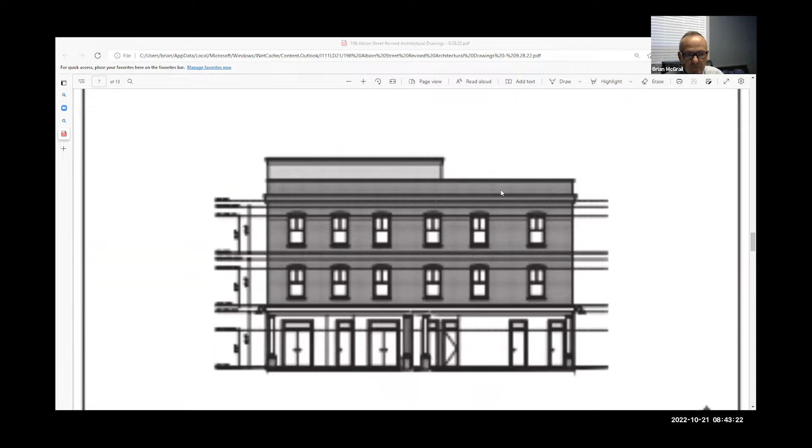This is really the quality building he's proposing. As mentioned, it's before the Board of Appeals now, and the hearings have, in my mind, gone very well. They like this building a lot, they like the style. Giancarlo has a lot of experience in Boston, so he's trying to match the brick in the area. This building will be all brick all the way around, so there won't be any fake sides to the building. I think it would sit very well on the corner. This is from the Albion Street side, and I'll give you a little bit of a look at the nighttime view, and then some of the materials.

John, do you want to put up your site plan and walk the board through it? There is a bit of a benefit here: for the laundromat, there are a number of curb cuts. We'll be closing one of those up to control the traffic flow a little more than what's happened at the site in the past. John can walk you through the site plan, and then Scott can talk about traffic, which I'm sure you're most interested in.

Good morning, John Ogren, Hayes Engineering. What I have up on my screen is the existing conditions plan. You can see the laundromat, and that the majority of the existing lot is basically paved. There's parking out in front, and a fenced in area in the rear. This property is just over 15,000 square feet. It resides in both the business and industrial zones—majority of it is in the business zone, with a small corner that's industrial.

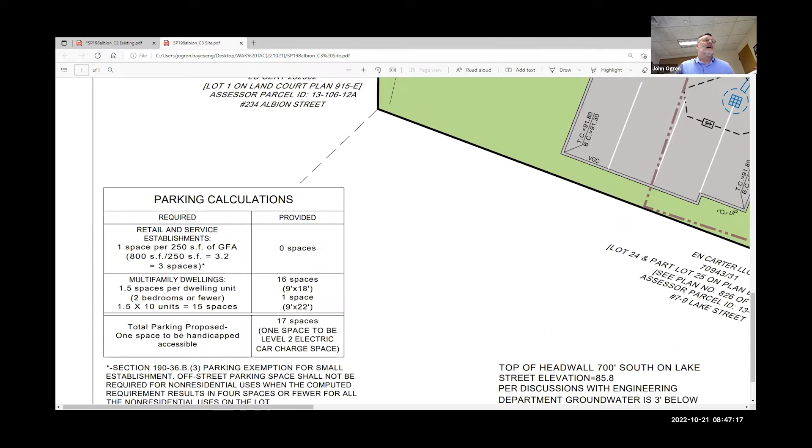The two components are the commercial portion and under zoning section 190.36.b.3, there's an exemption for smaller establishments. If it results in less than 4 parking spaces, there is no parking required. We have about 800 square feet of retail, which calculates out to about 3 spaces, which is less than 4.

So no spaces would be required for that. Looking at the multifamily, it's 1.5 spaces per dwelling unit, and 10 units would be... I'm sorry, I misspoke. Required would be 15. We're proposing to have 17 total parking spaces. One of them will be handicap accessible.

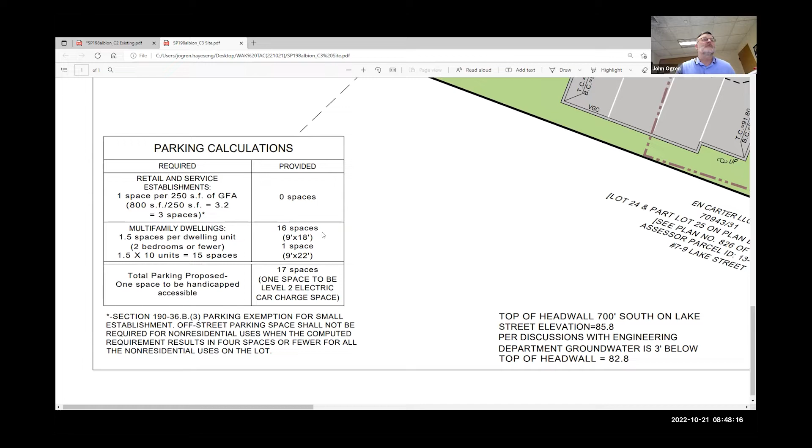We also have a note that one of them will be an EV charger. We'll have an EV charger. I think we're looking probably toward this space, but we haven't really decided that.

The only other thing in terms of traffic and flow I'd like to add, in discussion with the ZBA, they did request that we look to see if we can add another parking space, and it looks like we may be able to with some small tweaks, sliding this forward. We'd still have about 10 feet from the back edge of the sidewalk. We might be able to get another parallel parking space in there, which would bring our total up to 18. And one other thing is there are existing sidewalks all along basically the frontage of this property.

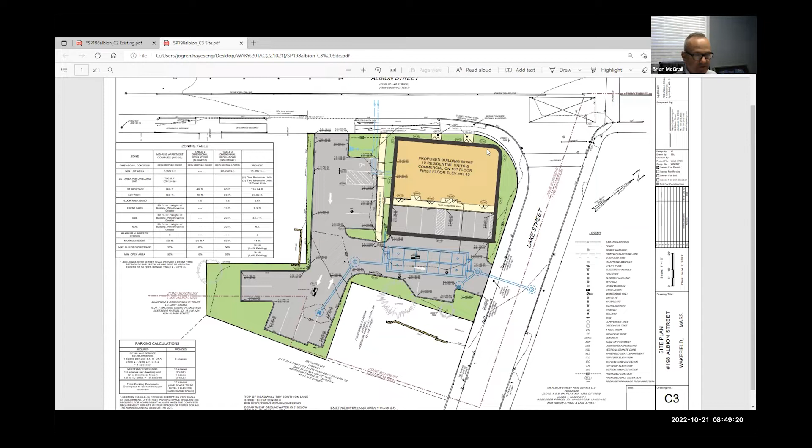I can answer any questions, or I can go over to Scott. Yeah, I'd just like to add real quick, the makeup of the units is there's actually 8 one-bedroom units and 2 two-bedroom units that are being proposed.

All right, what would visitor parking look like? So are these assigned spaces or? Usually, sometimes the zoning board will want that, sometimes they won't. So we haven't really gotten that far with them on how they're going to want that. If you wanted to make a recommendation, I'm sure they would entertain it.

So my only concern is that there's time restricted parking on Albion Street, and there's really none in the Lake Street area, that's all restricted there. So there's not a whole lot of opportunity for overflow for visitors and things like that. So as long as that's a consideration.

I think piggybacking on that, I just want to make sure that the retail that's proposed is going to work. I know you can go after the exemption for under 4 spaces, but I don't know how you have the parking to support it. Would that be on the street? Is that the intent?

Yeah, they're really looking at that. This is right within the railroad. You've got a lot of residential that's gone in there and is going to be going in there, so it's really going to be a lot of foot traffic that's going to service that retail. It's not going to be a huge retail, it's going to be under 1,000 square feet.

Now, are these condos or are these rentals? The intent at this point is rentals. Okay. Is that correct, Giancarlo? You're there, just to confirm. Yes, that's correct.

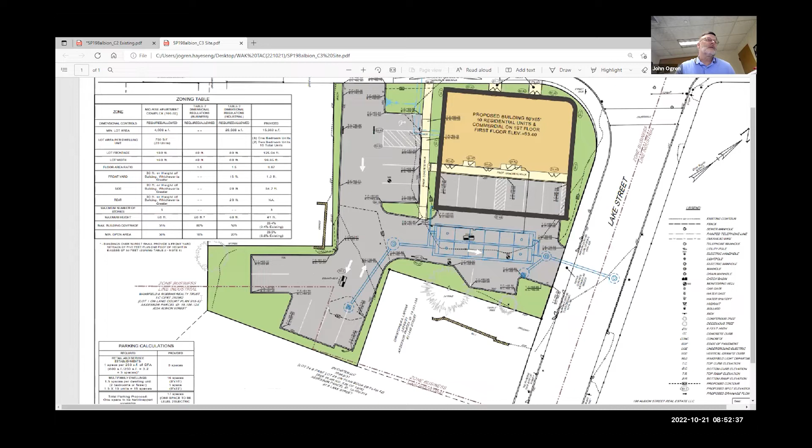Or even adding one, and it looks like you can also add one towards the street too, with the main entrances. Yeah, we were trying to keep it, you know, initially we were trying to keep the requirement for 15 feet off of the right of way for parking, but obviously with us sliding this forward, we're not going to be in that. So we could look at the potential of adding another one here too.

I think if you got the extra 4 spaces, I'd feel very comfortable with this, personally. Yeah, I would agree, Bill. A few more spaces would definitely help, and I think as long as the developer understands that there's time restricted parking on Albion Street, which would obviously help the retail and restaurant end of things. But as far as overflow parking, there's really no opportunity for that on street. And as you get into the neighborhoods off of Albion Street, that's all time restricted or exempt by resident permit, and that would be for residents of those streets, Cedar and the like. It would not be available to residents of this or any multifamily. So even though we have some permitting in the area for those side streets, those are not available for residents of other streets. That would just be my little asterisk there. But a few more spaces, I would be comfortable with this. It seems like it's fairly low impact overall.

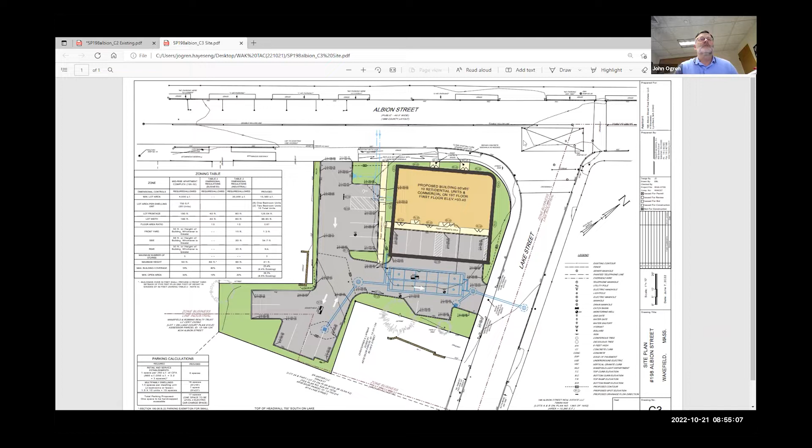Yeah, we can certainly do that because the requirement for the multifamily dwellings is 15, and we have 17 total spaces. And that would provide whoever's working in the retail a place to park. Right, so I think if you were to add that space towards Albion Street, have that as retail space that provides at least a spot for folks to come, and then you could do like a shared parking model at night, that definitely works. Just adding the other spaces and the tandems below, and then you meet your parking count, and I think the site as a whole will operate a ton better.

Yeah, so potentially add one here, add one here, and then the bottom left-hand corner is tandems. Even if they're smaller spaces, if you go with the compact or something, you're just adding spaces so people have places to park. Because you have a couple of 2 bedrooms, right? Is that what you said, Bill? Yeah. So you could just have the 2 bedrooms have those tandem spaces. I like that idea. It would be helpful if you would reference that to the zoning board. Yep, then we'll add that to our next comment letter.

All right, anybody else from traffic advisory on this development? Can I add one? Go, Dan. We're seeing more and more developments in Wakefield and more people that ride bicycles and motor scooters. Is it possible to have some kind of bike rack on this? Or am I speaking out of turn? I know we have one level 2 EV charging station, and that's great to see. But I think more and more we're seeing more bicycles, so just have a bike rack somehow next to the parking. Yeah, that's a good point. I think we make that a recommendation as well.

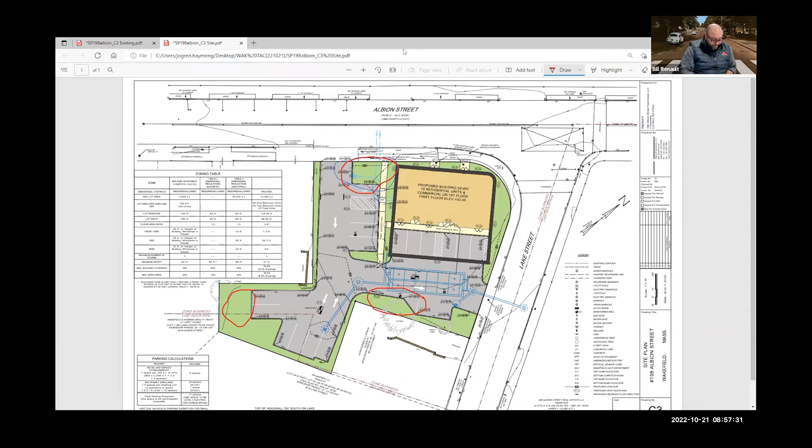All right, anybody else from traffic advisory have any comments or questions? Any members of the public have any comments or questions? We'll give about a minute for that.

Sorry, Joe, I did have one other question just about trash pickup. Sure. Just wondering where that's happening. I believe the trash is inside the building, so it'd be something that's wheeled out and picked up.

It's along those lines. What I forgot to ask, and it's not really traffic related, but I'll put my police hat on for a minute - secure package room or delivery, where's that going to be? Or is that part of the plans?

The common area, utility room on the first floor. How about cameras? Has that been considered?

Giancarlo, you want to touch base on that? What's your thoughts on cameras? Yeah, I would say so. Obviously, we do that on a lot of our other developments as well.

Resident safety for us is number one. In addition to being a developer, we own a property management company as well, so we deal with a lot of the packages. We have some secure entry systems where an Amazon or whatnot has a unique code to enter the building and leave packages and store them correctly instead of just leaving them outside. So safety is a priority, and cameras is something we're going to look into as well.

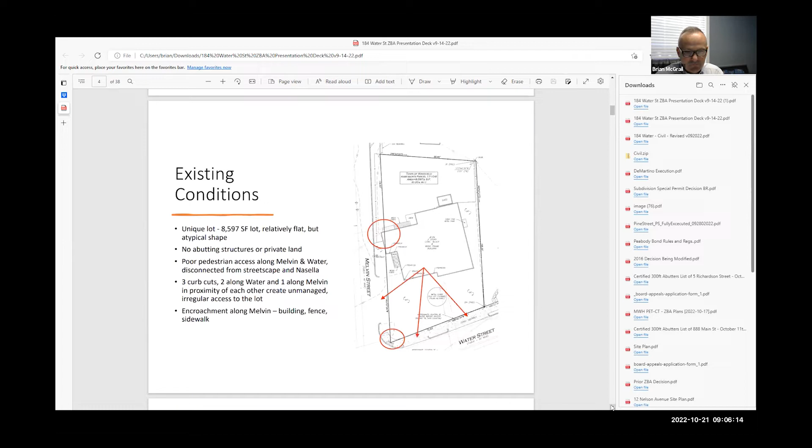There's very poor pedestrian access along Melvin and Water Street. It's disconnected. If you go back to these pictures, you'll see there's no sidewalk connection going down. So all the kids that go to the playground, the Little League - it's not the safest situation because there's no sidewalk here. And we're going to improve that.

This gives you an idea of the location. These trees really don't exist anymore - a lot of them have been taken down. If you go down there and take a look, this is kind of an old overview shot from quite a while ago.

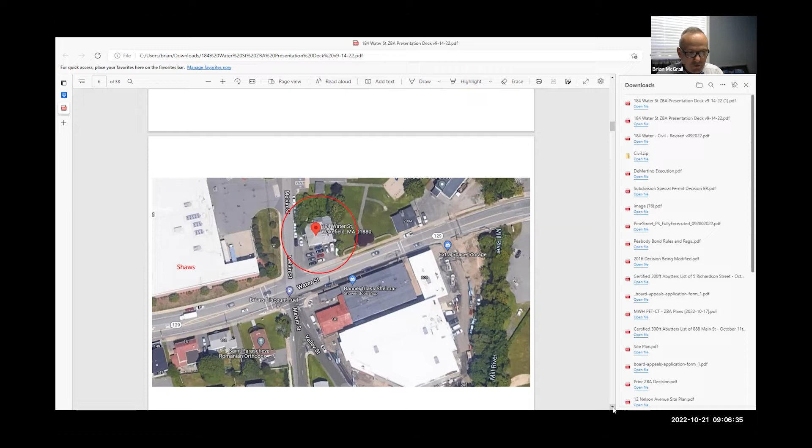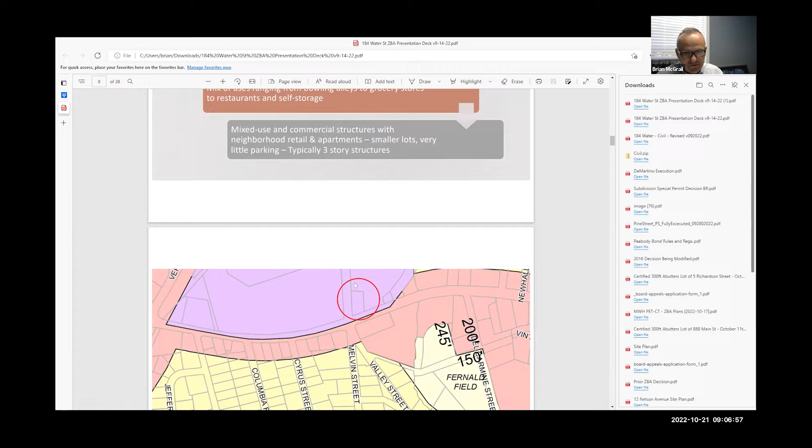As far as the neighborhood goes, it's a mix of business and residential use. It's zoned industrial - we've got the bowling alley, the grocery store, restaurants, self-storage. This is the little lot, as you can see, and this is Melvin Street, and this is the Nasella Playground - just a little lot that sits off on its own.

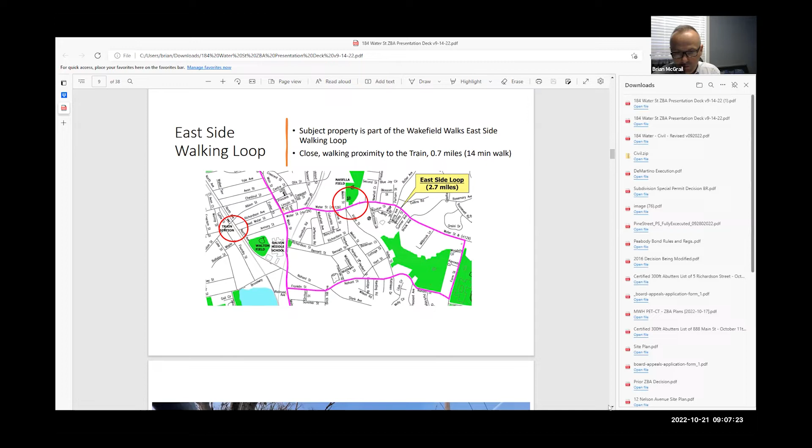Interestingly, this property is along what's referred to as Wakefield Walks, the East Side Walking Loop. It's in close proximity to the train - only 0.7 miles, about a 14-minute walk from the train station. As I mentioned, we're going to improve that walking loop with a lot of sidewalk improvements, etc. Just a shot from the other side of the street.

As I've mentioned, there are already 3-story mixed-use properties along Water Street. This is a three-story building as well that's being proposed. And this is the building. It's in the process of being refined through the Board of Appeals process, but I don't think anything's really going to significantly change.

One thing we're doing is anticipating this might be a cafe. We had input from some of the neighbors during the process that they would like to see that - it would probably work well with the Little League field behind it. So we're looking at making this landscaped area portion here probably end up being an outdoor patio with some tables that people can sit outside.

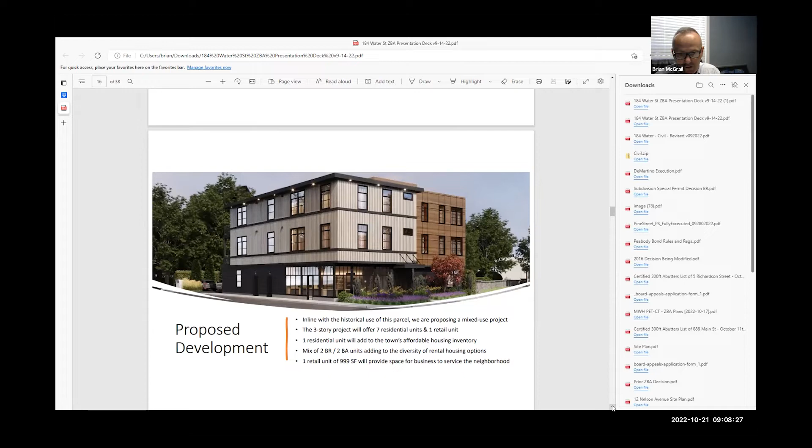It's going to be a 3-story project with 7 residential units and 1 retail unit. One of the units will be affordable, as I've mentioned, and will go to the housing inventory of the town.

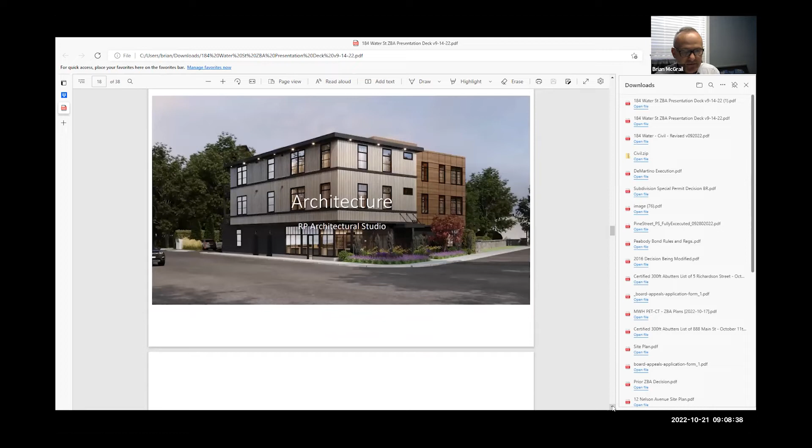This is just the architecture, which I'll go through pretty quickly.

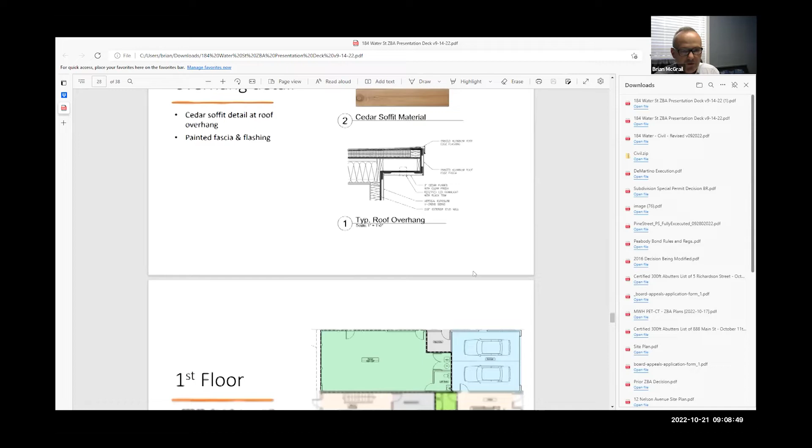I'm going to hand it over to Carlton, I just want to give you an idea of the project. Do you want to bring up your site plan and show the board the improvements we're proposing on the sidewalks and pedestrian connections?

While you do that, I wanted to highlight: we're going to have a lot of infrastructure upgrades with pedestrian walkways leading to the field. Three disjointed curb cuts will be replaced to manage traffic. Building encroachment will be taken out. We're going to add an affordable unit, a small business space, and remediate the environmental issues on the property. The parking graveyard will be eliminated as well. So Carlton, it's all yours.

I think I just need to be allowed to share. If you can, I got off, try again. It says a host disabled participant screen share. Oh, there it goes. Now, see it now? Yep, we have it. Okay.

As Brian alluded to, we're going to provide a concrete sidewalk coming around here, connecting Water Street down to Melvin Street, all across the front of the property, removing all curb cuts from Water Street, as that was kind of an open parking area.

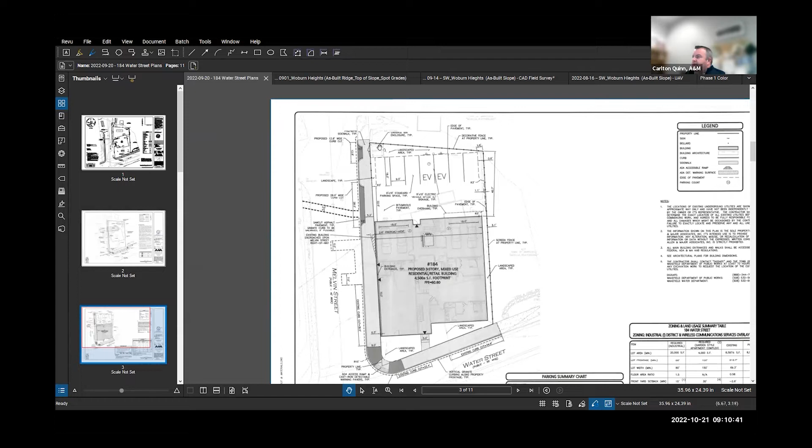Concrete sidewalks, granite curbs, ADA access ramp. The parking in the back has a 22-foot drive aisle. We're going to have 4 garage parking stalls and 7 surface parking stalls, and 2 EV stations on the lot. The dumpster will be provided a curb cut here to facilitate pickups.

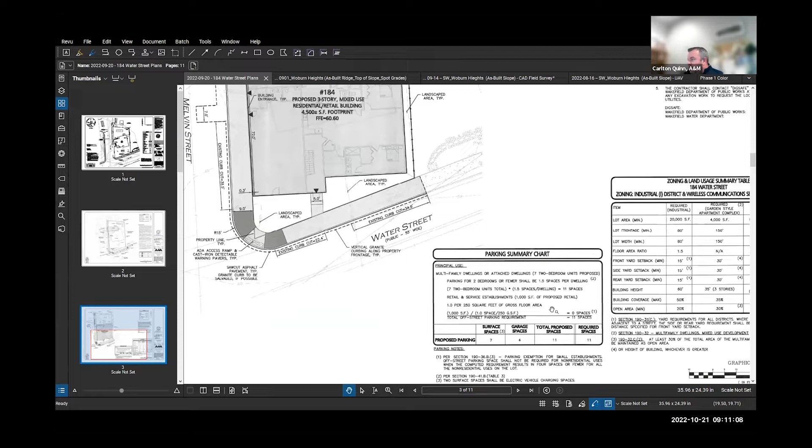That's generally it. We've provided this to the ZBA, noting there's a lot of on-street parking allowed in this area also, so we have adequate parking stalls. We have just under 1,000 square feet of retail, which requires no spaces, and 7 two-bedroom units requiring 1.5 spaces each, which requires 11 stalls, which is what we provided.

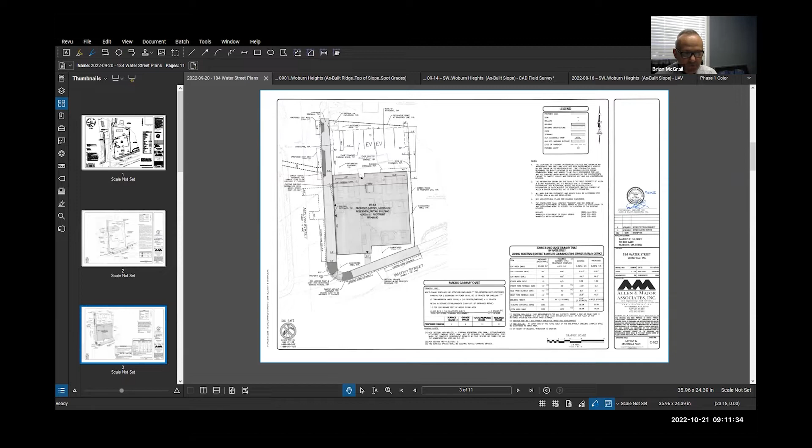Alright, any questions from TAC members? I had one question related to the layout of the driveway. In between the main driveway and the access for the trash, there's some curb space there. Would parking be restricted in that one little stretch? I'm not sure if it's long enough for an on-street space, but I imagine people might try to use it for parking.

Yeah, that wouldn't be big enough for a car to park there without restricting access to those 2 items, so we need to restrict parking in that location. Yeah, I just want to make sure - I couldn't tell on the scale if a car could fit there.

Lieutenant Anderson, this is Julie Smith Galvin, sorry I'm off camera. I would just recommend people look into bike racks around there. There's going to be a lot of kids coming between the schools and going to Shaw's along that way, and if there's a cafe there, I think it'll be a huge attraction for people who are not in cars. Maybe the town can work with the developer and put bike racks there for both Nacella and for this space.

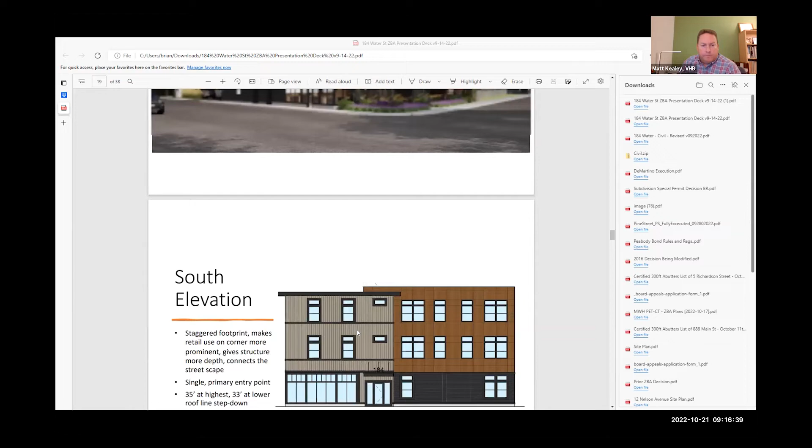It's fine. There's also, Severio, are you there still? Yeah, I was going to say, just one note to keep in mind, since that version of the rendering you've got there - given feedback from some of the abutters and the interest in having a cafe, we actually proposed during the last ZBA hearing converting that landscaped area on the immediate corner there into an outdoor seating area, a patio.

So we've gone ahead and updated our plans, Carlton's team has done that. We presented basically a draft version during the last hearing, but we'll formalize that during the next hearing. So you won't have any landscaping there, you'll have an 18-inch tall wall. We just put a small decorative wall up to kind of enclose the patio area, to define it a little bit better. So there will be that small wall, but it won't be any taller than 18 inches.

Got that up on the screen now, Severio, you guys can see that? Okay, yeah, perfect. Can we make sure that's like a porous paver? Is that doable? Would you have an issue with that? I'm sorry, say that one more time. To do that in a porous paver as opposed to a standard concrete or paver patio?

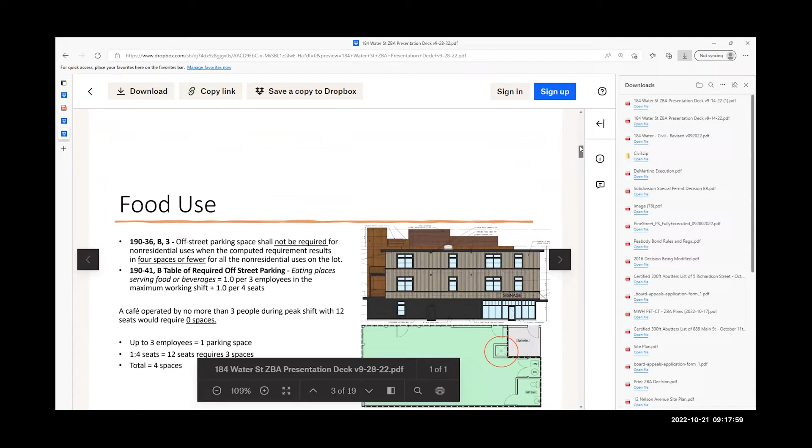Yep, yeah, that's actually what we proposed during the last hearing. It's actually a Techo-Bloc, it's from the Linnea collection, I can send you that offline. I've already used it, I know it. So that's the one, okay perfect.

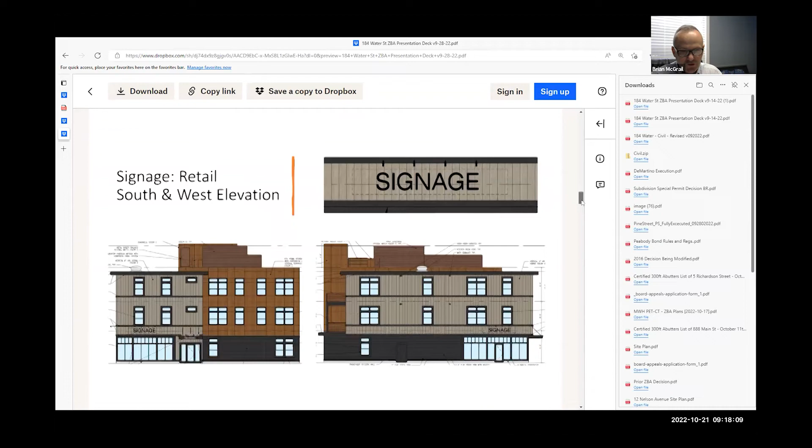Can you also address - because you've got Bill Renault on here now - we talked about doing some landscaping between our building and the park. It's kind of like an old chain link fence there, Bill, that's in a state of disrepair, and as part of this, to kind of spruce up the park in the neighborhood, Severio has a desire to do some landscaping and clean that up a little bit.

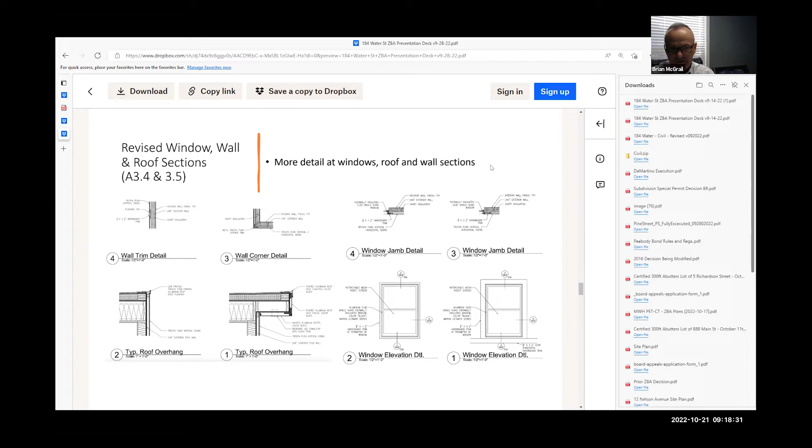Go ahead, Severio. Yeah, so our rendering company took a little bit of creative liberty and saw that there were vines in the existing Google imagery. So they actually put in hedges, but in talking with Carlton's landscaping team, it doesn't seem like it's going to be really realistic to do a managed vine system.

I looked into a few options and was going to let the ZBA know, because Jim McBain mentioned he kind of liked the design. We considered it and actually went out to a couple of vendors, but the cost is astronomical for 80 linear feet. It's going to be like $100 grand by the time we're finished, we just can't absorb that kind of cost.

That seems like a great amenity, no? Right, yeah, literally a vine wall, it's crazy.

So we're now proposing a tan colored fence. We'll clean it up obviously, but we're wondering, that fence, we're not sure who owns it, whether it's Wakefield's or the previous owners. We're wondering if everyone's amenable to us just removing the chain link fence and replacing it with our vinyl fence.

It doesn't jump out at me as an issue. It's kind of like a typical playground fence, Bill. It's kind of rusty and in a state of disrepair, no one's fault, time has kind of passed it by. At the same time, it will clean it up and make it safer for the park and for the project.

That would be on your property though, right? So it's not on town property? Yep, exactly. We would just remove it, I don't know exactly where the fence line is, and Carlton could probably speak better to that, but I don't know who even.

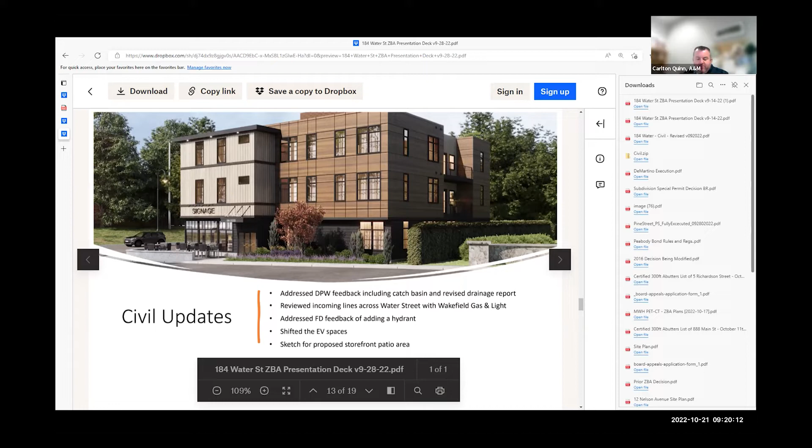Yeah, it's right in this area. It's mostly on our property, just kind of weaves in and out of the property line. It's right on the property line. I don't see an issue at all. It sounds good to me. As long as ZBA is on board with it.

Brian, okay, yep, awesome. Joe Conway, Mr. Mayo, this is Joe. Can we, when you guys get an idea, just make sure you shoot that to us? Because there's actually two other sections of chain link to the sides of that fieldstone wall. I think to dress the whole thing up, we might be interested in seeing what you go with.

If we could do something similar to kind of dress up the frontage to Water Street there, whenever you get that, if you can just shoot it to us, I can talk to Dennis and Bill and go from there. Maybe we'll clean up the whole thing while we're at it.

Yeah, that's fine. This kind of shows you that chain, see it there going along the side of the building? Behind that Isuzu there, we actually have like 4 feet there, 4 feet to the other side, just kind of connecting the infills. So we'd probably be interested in cleaning those sections up too, so we don't have the beautiful building there and then leave 8 feet of the old, past its time fence.

Yep, I see it. It's essentially 2 extra sections of fence, but I'd hate to see it all get uniform and nice looking, and we leave those in place. Yep, we can definitely do that. We'll take care of that, Joe. Thank you, I just volunteered Severio to do that work.

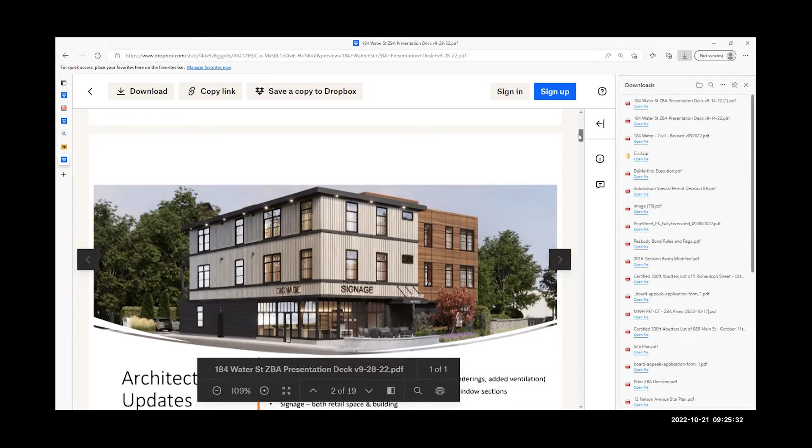Looks like Water Street, right here in the corner. So the seating is actually really along Water Street. The way I'm looking at it, that little retaining wall is essentially on top of the curb, and then you have tables and chairs, and the sidewalk will run between the building and the tables and chairs.

The sidewalk is outside the wall. Oh okay, so you would walk around it, and there's going to be a sidewalk installed going down Melvin Street towards the park. None of that patio will be in the public way, and we're going to upgrade basically that entire sidewalk walkway wrapping around the entirety of the lot, so we'll make all those improvements. So rather than right now where it's all disconnected with different means of access to the lot, we'll actually connect everything so it'll be a seamless transition.

I can share a site plan of the seating, the patio, if you want. That's fine, go ahead. What I was going to say is what you just explained makes a lot more sense, I just couldn't tell the orientation there. This might help, it'll be great for someone like yourself. If you're walking over from Wiley, you'll be able to just cross the street and make your way right around to Nazella. Okay, go ahead, I was going to move on.

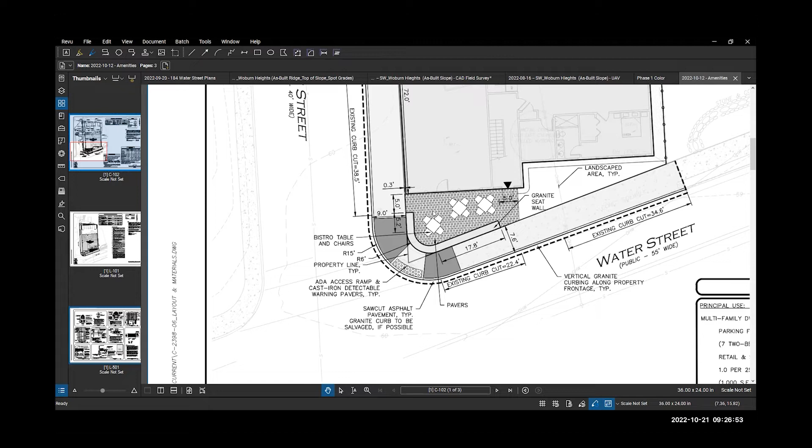There was discussion about the signage there. I've actually already submitted a comment or request to the DPW. The crosswalk that was put in on Water Street, that goes in between the stone wall there to the playground, was repainted and the curb cutouts were done, but there is no signage for that crosswalk at the current time. Definitely, looks like we forgot that when we reconstructed it, so we'll add that in.

That would be great, because there are a lot of kids I see going in and out of the park, both on foot and on bike, that try to use that crosswalk, and it can definitely be a challenge. The crosswalk is also missing from the documents provided as part of the traffic study that show potential parking on Water Street. Another recommendation from Safe Streets Wakefield would be to block parking on either side of the crosswalk, just to improve visibility and safety for pedestrians, especially kids, now that you're going to increase crossing there to get to this building and cafe. That would be great to have a little more buffer zone around the crosswalk.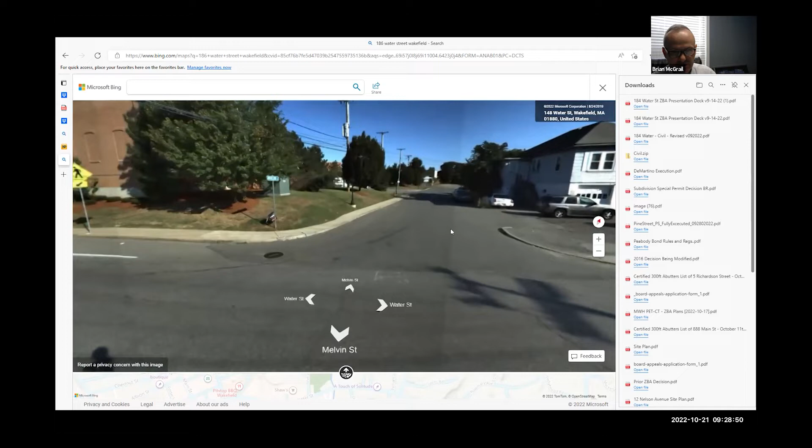And even more importantly, when kids are going to the playground coming from the Montrose Ave side, if they don't go in the front gate, they've got no way to walk safely down to the park. So all this will now be sidewalk going down. I think it's going to be a huge improvement and a huge safety improvement for the park.

Brian, can you go back to the crosswalk? Is that the crosswalk Kathleen's talking about? I think it's on the other side, it's not shown on that plan. Oh, it's not on here. This is the old one. No, yeah, I see this on the street. There's one right there, Julie. No, that's not the one we're talking about. We moved that to basically the entrance of the park. Excellent, okay, yeah, when we reconstructed it. So now it's here, Bill?

Yeah, and signage is definitely important there. If we have any of the blinking signs, this might be a high use area for it, Lieutenant Anderson, just to think about. It's definitely a good one.

Are we comfortable with that, Brian? I can't hear you, Bill, what did you say? Are you comfortable with a flashing beacon and funding a flashing beacon at that location? Severio, Severio, are you there? Severio? Sorry, yep, I'm here. I'm sorry, what was the question? If we're on with what? My service is cutting out.

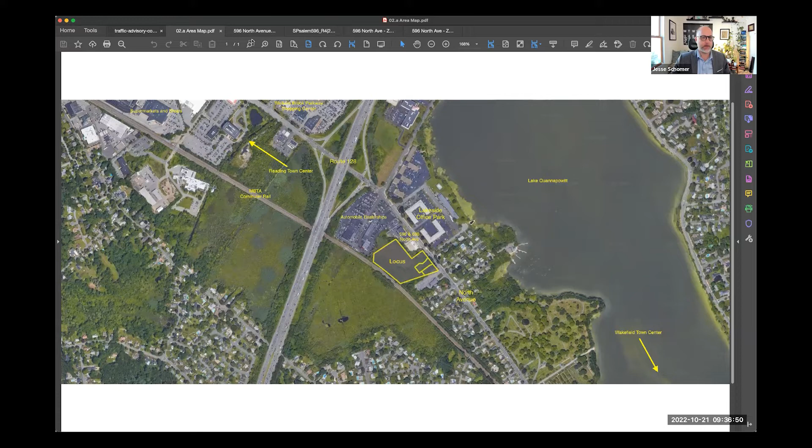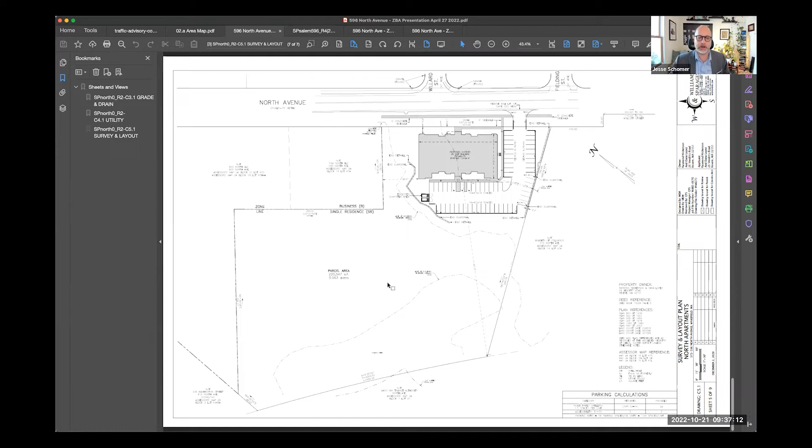I'll go to the next slide. This is the site plan of the project as it was proposed the last time we were before you, back in April. As you can see, the building is at the front of the site, there's a single sidewalk connection here, and the rear portion of the site is completely untouched.

The architecture has changed significantly since last we were before you. This was the proposed project as it was back on April 27th of this year - as you can see, it's a vision in gray, white, and muted black tones. It's currently been revised significantly through the ZBA's design review process.

This building here, which we think is much better looking and really complements the residential neighborhood to the south and across North Avenue down towards Wakefield Town Center. The current site plan - I won't steal Chris's thunder, I'll let him go over the changes in detail - but as you can see, this is the revised version of the building. The parking area is primarily the same, but we've added a significant number of landscaping improvements, including a fire pit, grill station, and a proposed covered bike rack area here for residents.

One of the changes to the project, which has come out of the subcommittee review, has really been to provide some improvements in the public right-of-way to really dress up the building and give it sort of a grand estate type feel. That was something the zoning board really pressed us on, and we were happy to do that, subject to our ability to work out an agreement with town counsel to provide that we will be maintaining this area and making sure these sidewalks are clear of snow and things of that nature.

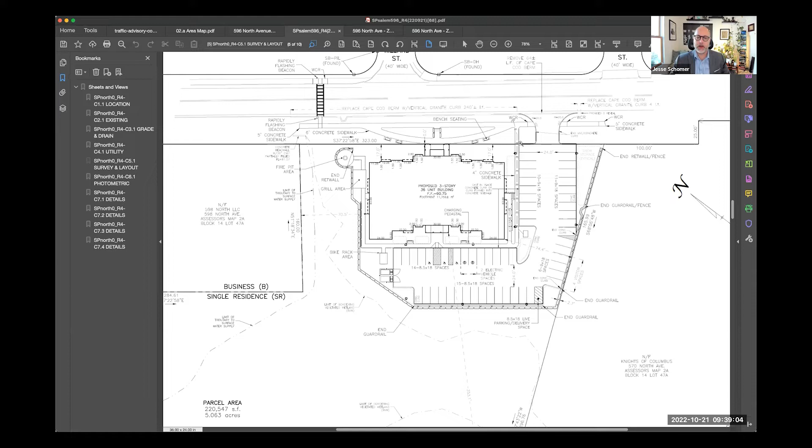As I mentioned, we were back before you in April, and at the time, you may remember that the primary issues we were dealing with had to do with visitor parking.

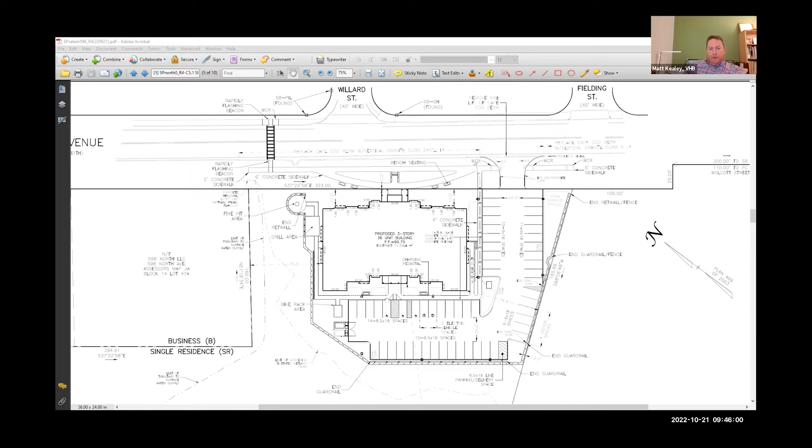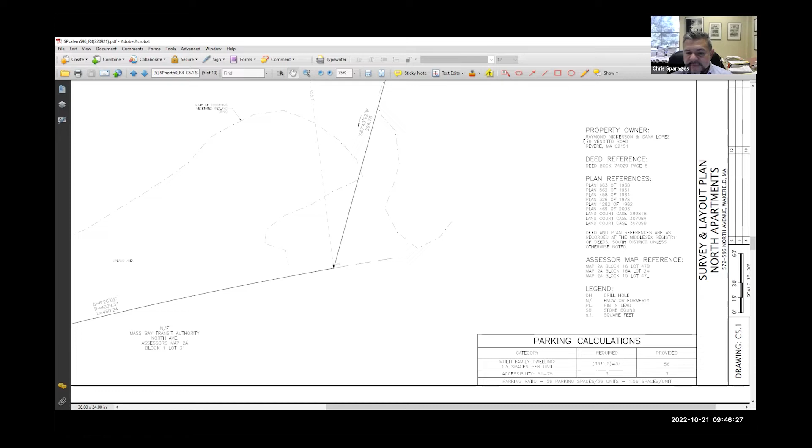Anybody else from TAC? Matt, any comments? I was just curious what the parking count was before versus now - is it for new spaces? The total parking count works out like this: the requirement is 1.5 parking spaces per unit, so that would be 54 spaces required, and we're providing 56 parking spaces, 3 of those being handicap accessible. Okay, thanks.

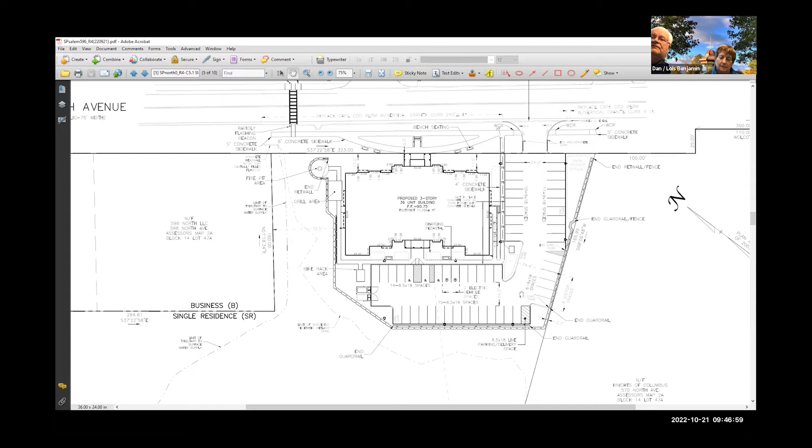Dan and Lois, I don't know if this falls under traffic or parking, but is it possible to move that bus stop further up towards the car dealership, maybe in between all 3 developments? With this many people, they might be jumping on that bus to go down to the commuter rail or connect with the shuttle bus from the new development at the head of the lake. Yeah, Dan, we talked about that with the developer this week in my meeting - that's something the town has to work with the developer on, so that's something we're going to do. We agree, it makes a ton of sense to move it here. Not many people are going to get on at the car dealership. That's what I'm saying - and they're concerned there's no sidewalks and no way to really get there. I guess you could take the bus and then get yourself a car to drive away, but yeah.

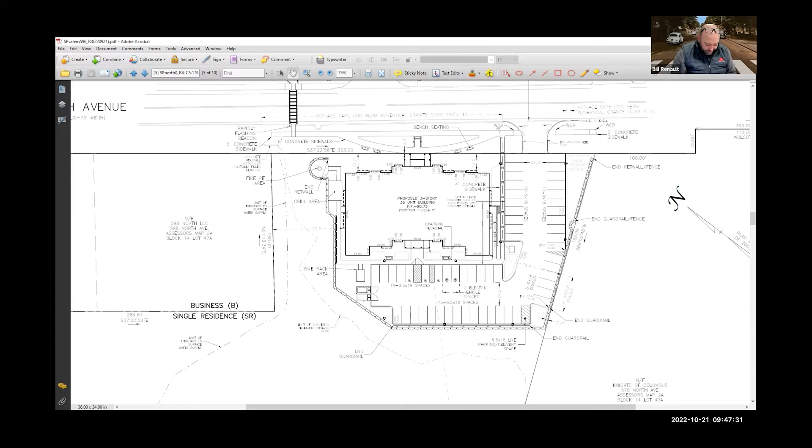All right, any other comments from TAC? Any public comments? Any comments from any members of the public on this agenda item?

All right, Attorney Schomer, I think we feel comfortable at this point drafting a memo based on the changes, unless you have anything else for us - I think we're good on our end. Great, thank you very much. We appreciate your time. Scott, did you have anything you wanted to add?

We didn't go to you yet. No, that's fine, I think just Scott's mere presence alone was enough. That's right. No, I'm not sure if it was referenced, but in April weren't we at 38 units and now we're at 36? That's true, yeah, so that helps the parking to work.

But I think that the changes were mostly site plan related, and it seems like the project's moving forward. So I really have nothing to add. Thank you for the opportunity, though.

Thanks, Scott. Just to give you a heads up about our timeline for going back to the zoning board - they meet next week, but we're planning to request a continuance to their first meeting in November. So if the TAC has an opportunity to provide a memo within two weeks, I think that would be plenty of time for the zoning board to review it. We appreciate your time and thank you in advance for preparing a memorandum for this project. No problem. Thanks for the extra couple of weeks. I appreciate it.

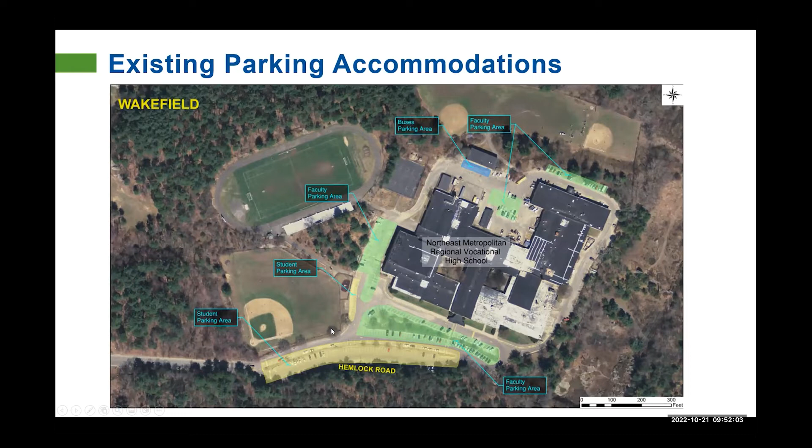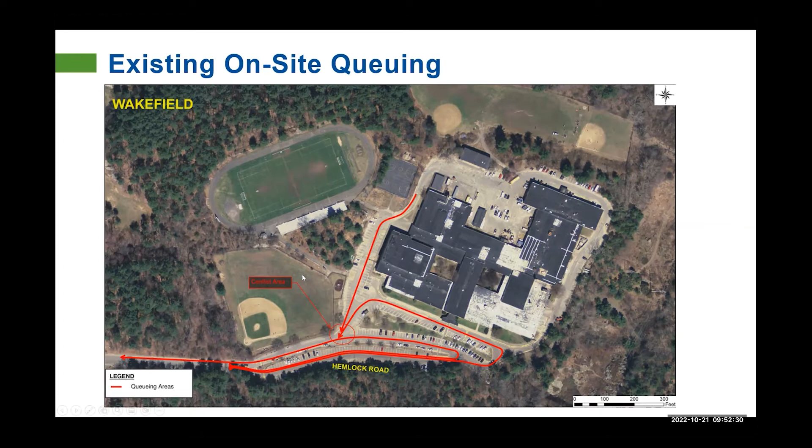So we were able to see what typical traffic conditions were around that area. What we reviewed was existing parking accommodations - so where's everybody parking, and approximately how many spaces are provided at the current time - existing site access and circulation. Through this, we were able to identify some conflict points that result in queuing and on-site delay. Then we looked at the on-site queuing more and realized how lengthy the queues actually are. So this led to obviously where we are.

Also, we looked at the two intersections that are going to be integrated with the new Wakefield High project. So what we noticed along Farm Street, there's a 50-50 traffic distribution. The Wakefield High and Northeast Metro Tech currently dismiss at the same time, which creates added traffic to that area. And as everybody knows at this point, there is excessive queuing coming back from Farm all the way on Hemlock.

So in efforts to mitigate this excessive volume at that intersection, we explored different areas for an access way. At the current moment, we have it located approximately 480 feet away from June Circle, or 250 from Old Nahant.

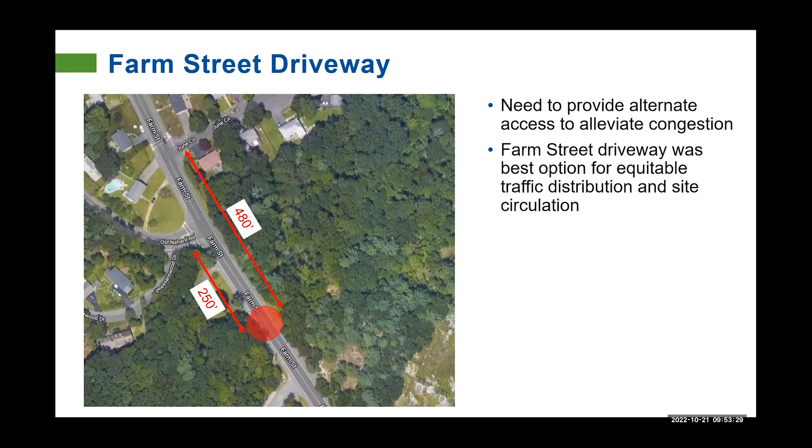So that then led us into - now we know generally what areas we have to study and what intersections need to be looked at further. So we started our full traffic impact study. We looked at existing conditions, safety analysis, trip generation, parking generation, operations, and then identified some mitigation operations.

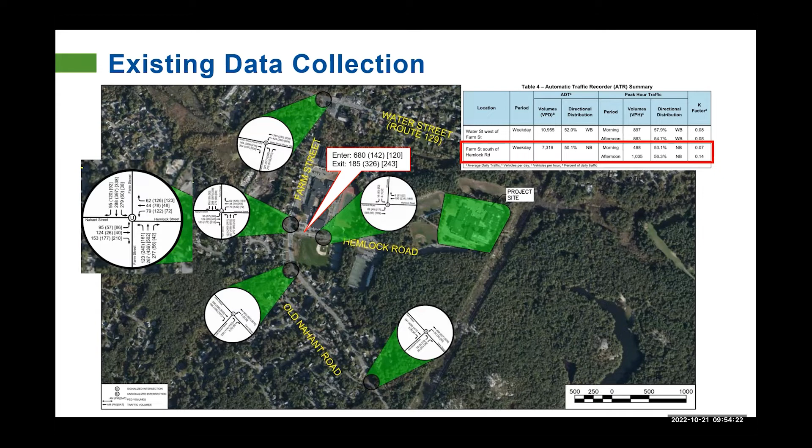We started off with our data collection, and really the main thing we want to look at here is the volume of traffic coming out of Hemlock onto Farm. In the morning peak hour, we have 865 trips, PM 468, Saturday 363. That doesn't even include the Farm Street traffic itself - that's just entering and exiting Hemlock. So you can see this is causing significant delay.

When we ran our safety analysis, we wanted to look at all these intersections we're studying and understand the crashes and crash rates, and what that means in terms of state and district averages. The focus here, obviously, was the Hemlock Farm intersection, which over 5 years only experienced 18 crashes, averaging 3.6 a year. That translated to a crash rate of 0.43, well below the statewide and district average. So from a safety analysis perspective, in terms of crashes, it does fall within acceptable levels.

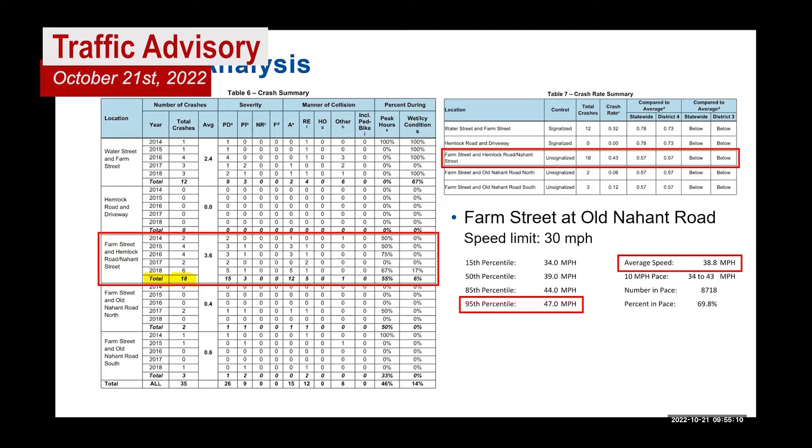Where we see issues, and I think this is also common knowledge, is the speeds along Farm Street, right at Old Nahant. Although the average speed is only about 9 miles per hour over the speed limit, the 95th percentile speed is 17 miles an hour over, which is 47 miles per hour. So we obviously recognize that there needs to be some kind of traffic calming measures at this location.

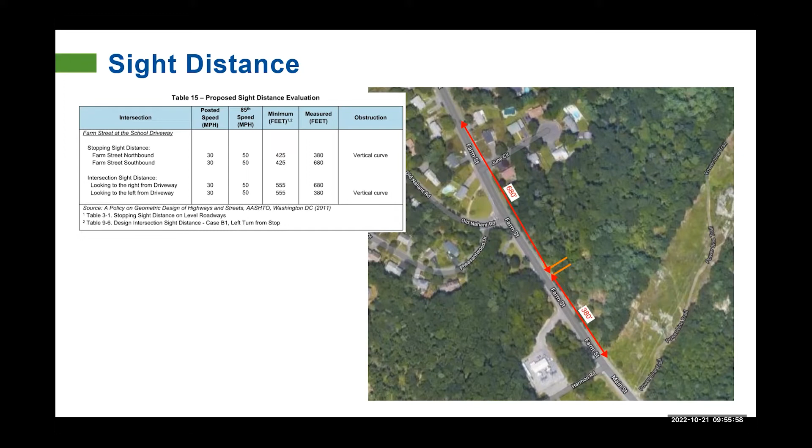So going back to this driveway, we looked at sight distance, and we found that it doesn't meet all criteria, especially looking left. So once again, another reason to need some kind of traffic control at the location. Looking at future traffic, we ran our trip generation and established volumes associated with each intersection — Hemlock and Farm, and the new Farm access way.

I want to preface this with: this does not include the added traffic associated with the Wakefield High project. However, working with that project team and with GM2, the traffic engineer on the project — I believe they're next on the agenda, we could talk more about that — we looked at their volumes, and what volume is going through our intersection, the Farm Street Accessway intersection, is very, very small. So the general results of our study and recommendations aren't going to change as a result. The more impact is at Hemlock and Farm, which I'm sure they will discuss more.

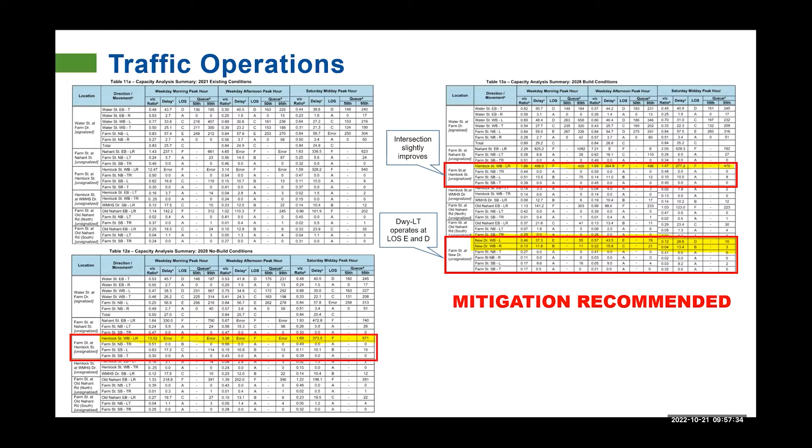So we ran our traffic operations, focusing right now at Farm and Hemlock. Like I said, the operations at that intersection fail. This doesn't include Wakefield High, but they analyzed this as well with their intersection, and just reading their study, I know they came to the same conclusions — it's a complete fail of an intersection. Looking at the accessway, if it was unsignalized, we see that it also runs at failing levels of service. So we obviously need some mitigation there.

Stepping back, looking at the site plan real quick, more from an access and circulation standpoint and where this driveway is: the Farm Street driveway is intended to provide access for parents, students, and buses. Hemlock Road, we see, is going to be primarily used as access to the Breakheart Reservation and for additional parking. The design for that driveway, our access way, is currently one lane in each direction.

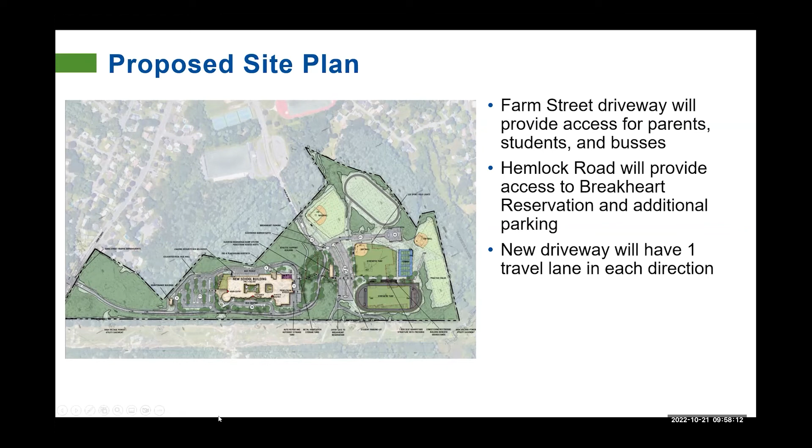So here was our first initial mitigation measure, which we've talked about — the concept traffic signal. The intersection does not meet sight distance requirements, however it does provide the traffic calming measures we see are necessary from the speed study. We feel the signal provides traffic calming in the sense of a visual delineation of a narrow travel way, and also the presence of the signal itself and its flashing mode will help slow down vehicles. The traffic signal drastically improves queuing and delay at the driveway approach, and it minimizes offsite impacts to wetlands and abutting properties, with no land takings.

Just looking at this from a wetland perspective, the traffic signal option only impacts about 8,000 square feet of the wetland buffer — I want you to remember that number, because when I compare it to the roundabout, you'll see the difference. So, like I said, this drastically improves level of service and delay.

And at the request of the TAC, we did look at the roundabout. What we found is that it provides that same traffic calming; however, it's very costly. The wetland impact is significantly larger — the traffic signal was 8,000 square feet, this is 19,000 square feet — and the right-of-way taking to the west is 2,800 square feet. On top of that, test pits were required for the geotech work on the site, so there's a lot of added cost with that.

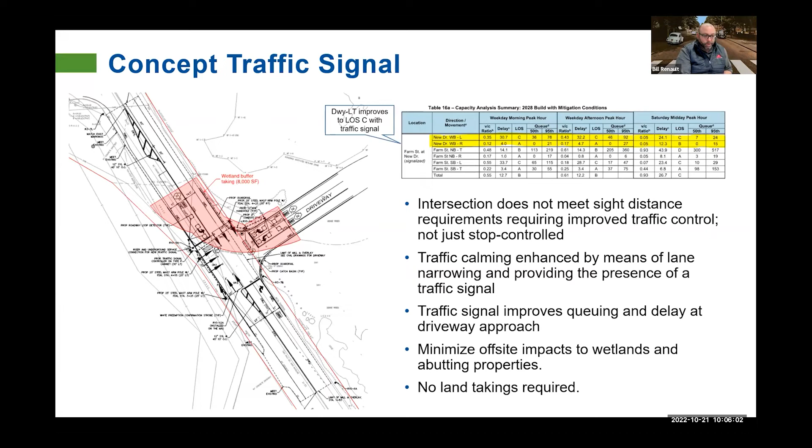The land taking on the other side could essentially be a land swap with Gas and Light, because they're looking to install a battery farm for your project too. We're looking for 2,800 as opposed to the 2 acres I think they're installing. Honestly, from my perspective, this is a no-brainer that demonstrates that it works, and it is my preference.

I'll echo what Matt has said, and I'll also echo what Lieutenant Anderson said, that this will provide the traffic calming that we need in the area, and that seems like the preferred alternative from my perspective as well. So I think all three of us are in agreement on that.

I'll just ask this question though - I assumed there was a sidewalk. Is there no sidewalk planned here? So when we did the roundabout, we wanted to put a sidewalk on the roundabout option just to see what it would look like, and it showed more of the right of way taking when we add that sidewalk. Okay, because the sidewalk to me is an absolute must. Yeah, I think we've all made that clear a couple of times in multiple meetings.

David Conway is on the line. David, would you mind speaking to the wetlands implications here? Yeah, thanks Joe. It's Dave Conway from Nitsch Engineering, civil engineer.

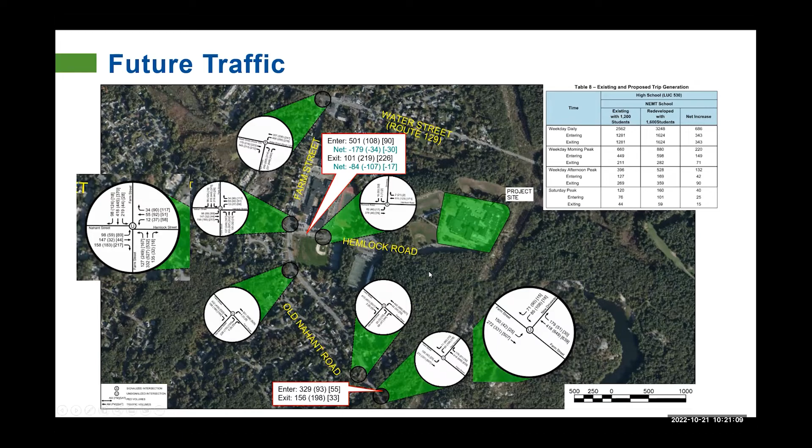All right, can you go back to the other slide, please? Thank you. Okay, so that's way up the street from it. Okay, that's helpful. Thank you.

I also wanted to say, you know, I'm really dismayed that more wetlands are going to be impacted. We really got to stop doing that. I understand it's a puzzle with moving pieces and it's difficult, but I just wanted to register my dissatisfaction with that, but I do appreciate the information.

Thank you. Just to be clear, Bronwyn, so you're aware, they're calling it a wetland buffer taking, but there's no actual wetland taking in this at all. So this is just work in the buffer zone, which we typically permit in the town all the time. Right, I understand that, and I'm sure there are going to be the usual precautions taken. Thank you.

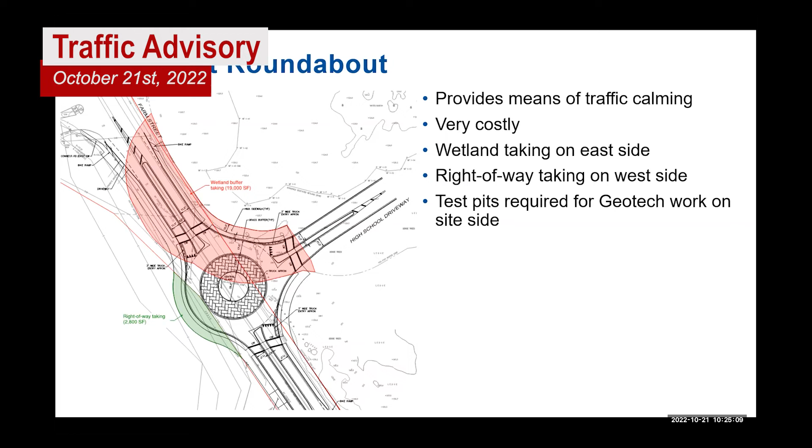Next we have Paul Rybicki. Paul, you have your hand up. Good morning, Paul Rybicki, 152 Parker Road. I had a couple of questions and one comment.

First question is the sidewalk that's now being looked at - what is the town going to require in terms of the width of the sidewalk? Five feet, that's typical for sidewalks around town.

Excellent, thank you. There's still no plan for any kind of bike lane here. At this point, no, that could change in the future, but looking at how tight we are right-of-way wise, I don't know how much room we'd be able to make work through there. So it looks like you'd have at least a shared use through the roundabout, and then as we get further down, we'd have to evaluate if we can widen a little bit to make that happen.

In my final point, I just wanted to say, for the record, that everybody pushing this project should be embarrassed calling this a driveway. When I asked the question about a sidewalk on August 24th, and said this was not a driveway, there was a debate - I was told by Kevin, it's absolutely a driveway. Well, you can call a duck a horse, it's still a duck.

In this case, the legal definition of a driveway is typically under 150 feet, and typically between private properties. Tell me how many driveways in Wakefield are over a half mile long.

If you look at the town website, it has clear requirements for a road. When I debated it at the August 24th meeting and was told it was a driveway, I was shocked that at the very next meeting, the materials handed out to me were labeled an access road by the project proponents. So they can't even be consistent in calling it a driveway. It absolutely is not a driveway - it is an access road.

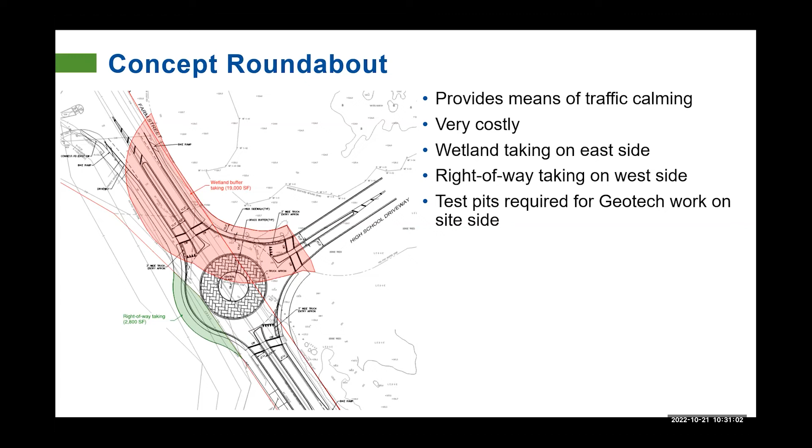Okay, any other comments or questions from members of TAC on item 10, or members of the town council, if you're still on? Nothing? Okay, so I think we're going to digest this second presentation, and we will set up a future date.

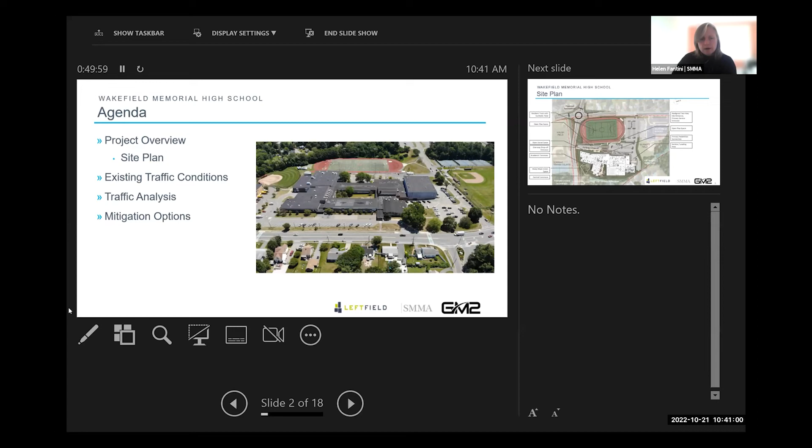To develop and explore various options for this important project for the town of Wakefield. We started out with 11 options about a year ago, but the preferred solution is a new building to be built in the place of Beasley Oval. It's approximately 260,000 square feet, designed for 1,600 students and 160 staff and faculty. I'm going to turn it over next to Erin to walk you through the site plan, and we welcome your input.

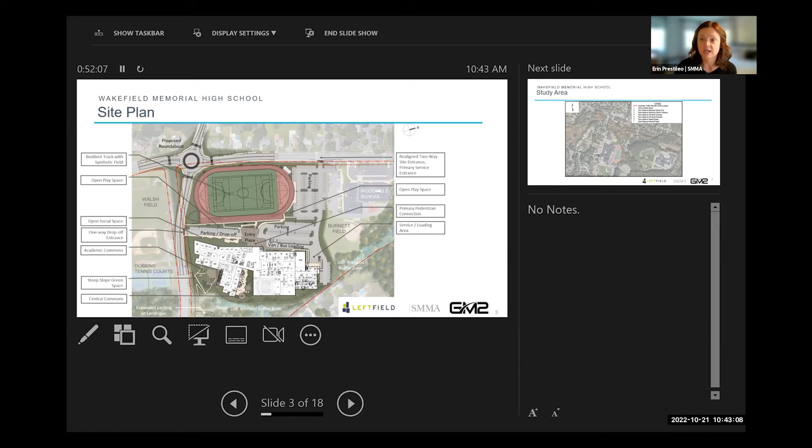So what I'm going to do now is hand it over to David. He's going to review the traffic study that was submitted to you all beforehand, review existing conditions, what we found, talk a bit about the two approaches we studied—the roundabout and the signals—and then provide some recommendations that were also included in the report.

Thank you, Erin. I'm David Giangrande with GM2, as I had mentioned. I'm a registered professional engineer in the Commonwealth of Massachusetts, and I have a master's degree focused in traffic and transportation from Northeastern University.

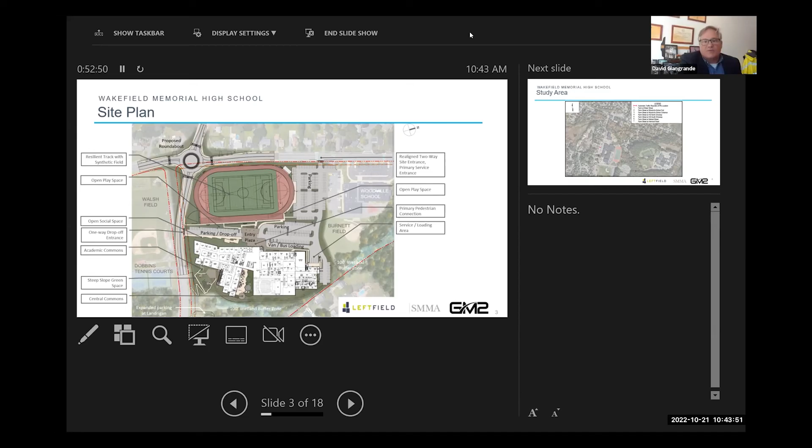I could mess with this slide, but I think what I need to do is stop sharing and step back into one of my other screens. If you'd like me to do that, I can. Sure, okay, I'm going to stop sharing, and then try to share again. I think I can use this screen and share that. No, sorry, it's coming up as the same. No, I have a full screen on my end at least. Oh, you do? Same here. Yep, same here, it looks good.

Before you get started, David, I also want to introduce David Capaldo—he's our construction manager for Bond Brothers, so he's joining us as well. It looks great on the screen now. Please, David, take it away.

Great, thank you very much. So GM2 was hired to take a look at the impacts of the proposed redevelopment of the Memorial High School, and then also, if necessary, conceptualize mitigation as it relates to impacts from this school. To facilitate that, we developed a traffic impact study, which I'll walk you through briefly. I don't want to take up too much time, so we can have some time for a robust discussion.

One of the first things we do in these traffic impact reports is take a look at the study area. In this case, we looked at seven different intersections, starting at the top of the screen at Water Street along Farm, then several other intersections along Farm including the Woodville School exit and entrance, the north driveway of the high school, the south driveway, and working south, Nahant and Hemlock. We looked at those as two distinct intersections because they're offset.

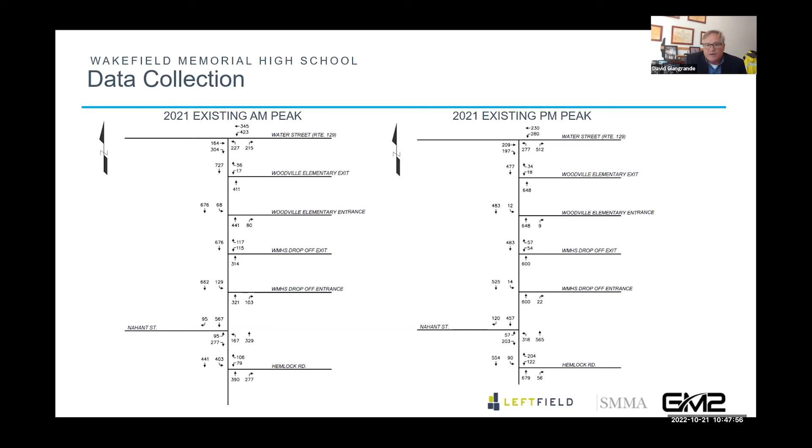We also take a look at all sorts of pedestrian and bicycle information. There was significant pedestrian activity, with more activity in the afternoon, and there was not a lot of bicycle activity. Now, that may have been a result of collecting data in November, maybe some of the kids that might want to ride to school, it was getting a little cold for them. But I don't think there's that much of a bias. There just isn't a lot of bike activity.

The one thing I would note is when we looked at the pedestrian information, we also collect crash data. So we collected the most recent 5 years of data that we could get, and we solicited the town of Wakefield, and that kicked us over. They report all of their accidents to Mass DOT, so we sourced information from them. One thing that will come through in the presentation is that out of all this crash data, we were well below the statewide average and the district average.

So there wasn't a lot of concern about the number of crashes. However, there were two issues with pedestrians right in front of the high school. We're going to talk about that a little bit towards the end, but we did look at all the crash data, and there was limited issues in terms of injury, and most of them were just fender benders.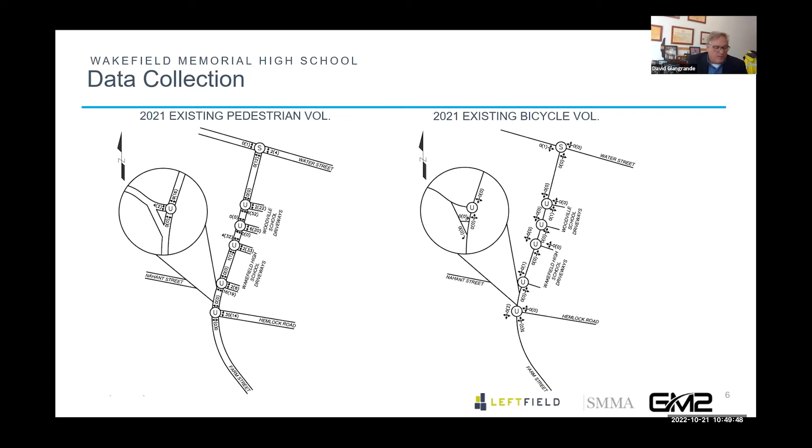So once we get to a point in our existing conditions and gather all this information, we put together an existing conditions report, and then we assess operations. How is the traffic signal operating? How is that intersection operating? So we looked at all 7 intersections.

If we look at it out there today, there's actually 3 trouble points. There's Farm Street, I didn't highlight it in yellow, sorry about that. There is a level of service F right at the top of the sheet here. That is Farm Street at the exit driveway coming out onto the Wakefield Memorial High School. That is functioning currently at a level of service F in the AM condition.

You also have Farm Street at Nahant, the eastbound from Nahant, the left and right are functioning at a level of service F. I'm probably preaching to the choir here, I get that, so I'll be brief. And then Farm Street and Hemlock, the westbound coming out of the school site, trying to take that left turn out of the school site. I think everybody's aware there's a problem there today. We'll talk a little bit about that as we go through.

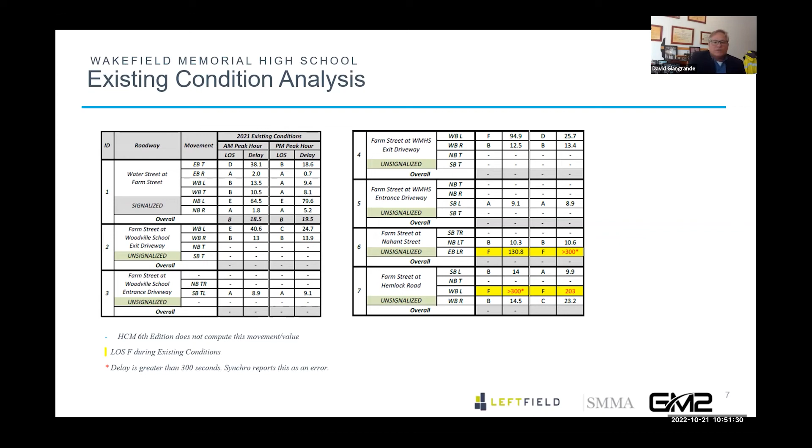What we do is several different analyses. We usually do an existing condition, a no-build, which is 7 years from when we collect the data, and then a build condition. A lot of times we'll do a build condition without mitigation, but in this particular case, because the level of service at the existing condition is poor, we know we're going to have to do some mitigation here.

So anyways, the no-build condition. No-build condition is, as we mentioned, just population growth rate information we get from the state level, and onto that we add the Northeast Metro Tech numbers. We coordinated those numbers, Brian and I and my staff reviewed it and came up with the corresponding numbers we felt for the modal split, how many vehicles would be coming to our location and how many would be going out the new driveway. So we considered, and this is a very important point, in our no-build condition that our school was not built, but the Metro Tech was built.

And then we do a level of service analysis. I'm sorry, this is a little bit difficult to read, it's hard to put on one sheet. But I think the important piece here is that, in particular on the left column, we have the existing level of service and then the no-build level of service.

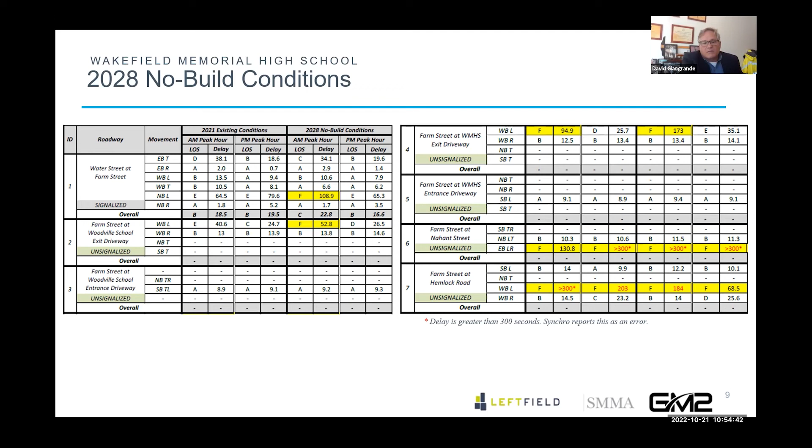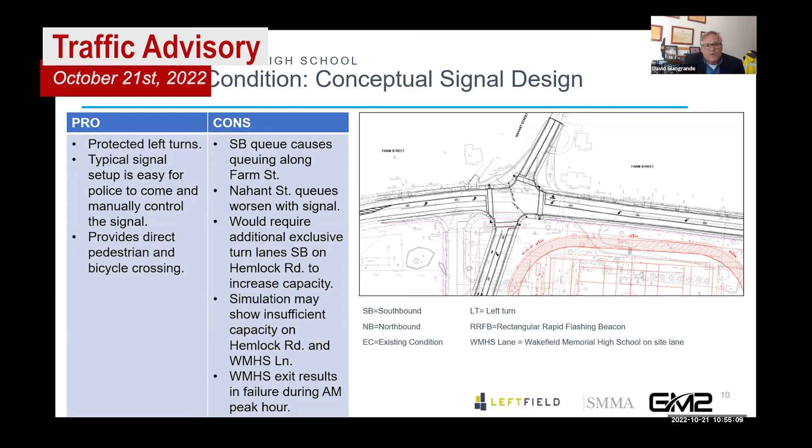So as we get to the next phase, the high school project is being built. What kind of mitigation can we offer? We have 2 alternatives. Option 1 would be a more traditional signal design, which you were discussing with Brian and the Northeast Metro Tech team. There's pros and cons with either solution.

On the signalized intersection, we have protected left turn movements. The signal can be set up for preemption for fire and police apparatus, and it has direct pedestrian and bicycle crossings. Very traditional, right?

The negative part is that the left turns create a long queue, and if you look in this particular design, the left turn queue bay goes all the way beyond the track, so it's elongated, and that would have some impact along Farm Street. The queues are worsened on Nahant Street due to the signals, because we'd be taking that piece of the signal pie and distributing it to other locations during those peak hours.

We'd have exclusive turn bays southbound, onto Hemlock, which we just discussed. There would be capacity issues internally because of the way the trips would platoon and come into the site when you have the left turn bay. So it would cause a little bit more friction internally as we're trying to move vehicles through — sort of a platoon of vehicles coming in, rushing in, and not potentially pulling up.

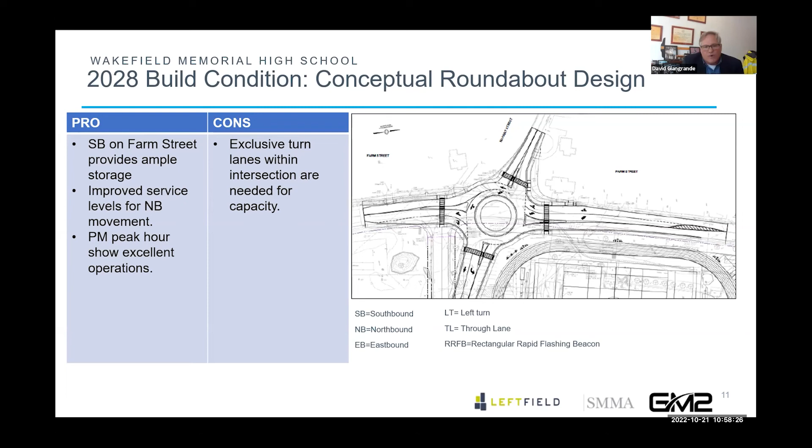When we look at the capacity of a roundabout, we're right at that tipping point — it's around 1,400 vehicles per hour, and we're slightly over that. So right now, on a conceptual level, this is what we're proposing.

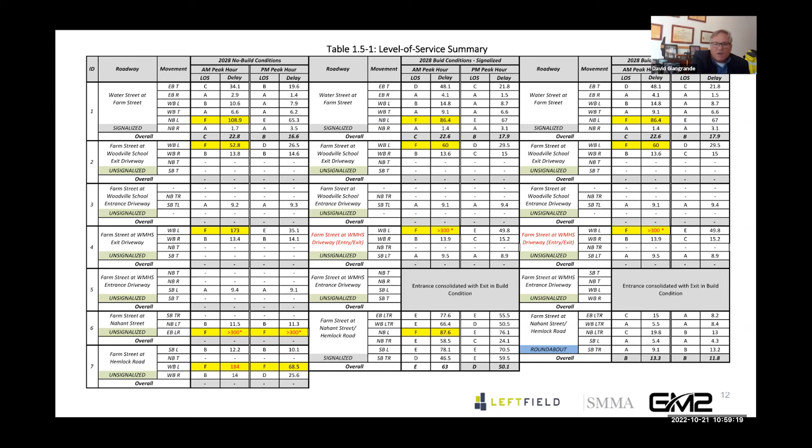So, conclusions: overall, both solutions provide a better overall level of service over the no build condition. Realignment of Hemlock and Nahant is critical — it's very important that we realign that intersection and make it 1 instead of 2.

Farm and Nahant requires exclusive turn bays. In either case, head-on and angular crashes are still possible. However, the crashes are less likely and less severe.

With the roundabout scheme, there could be additional rear end collisions or crashes. We feel that those will be, and data provides that those will be less severe. And we believe that over a period of time, the drivers will adapt, and some of those numbers will go down in terms of any kind of crashes overall.

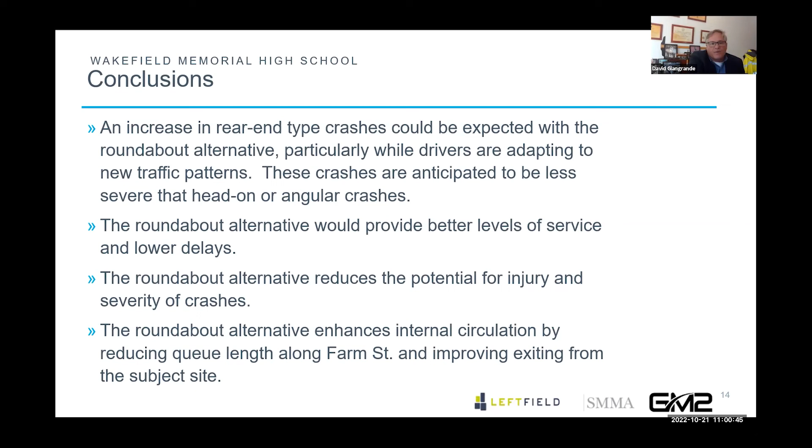So our recommendation: construct the roundabout at Farm Street and Hemlock Road. Construct the left turn bay. That is approximately 300 feet long.

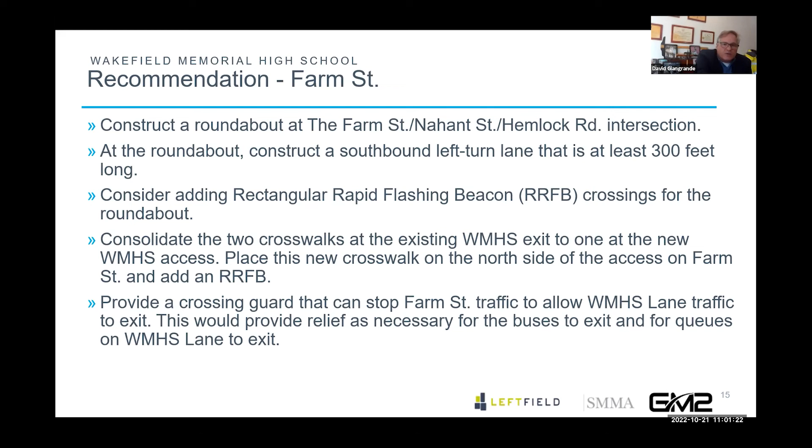We talked a little bit about the issue with the pedestrians crossing right at the driveways. We would recommend a rapid flashing beacon and realignment of the crosswalks there, so that we're controlling where the kids are crossing. Potentially in the future, a crossing guard could be at that location as well.

We should optimize the signals down at Water Street and Farm Street. We spoke briefly that that signal set will, from existing to the design year, degrade a little bit. So it needs some adjustment between now and 7 years from now, just with the normal growth.

We should implement some driver feedback radar signs. I'm sure you have those in the town right now.

And we need to construct two lanes through what we're calling Memorial High School Lane, all the way through to help with the queuing issue. But we're also allowing cars to come in off of Farm Street, not off of Hemlock. So those vehicles need to be able to pull in, quickly turn right, populate that parking area.

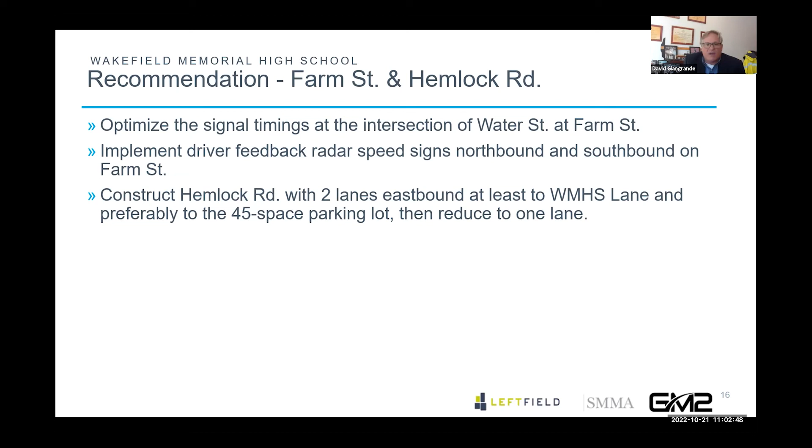As I just mentioned, the designated drop-off areas, designated number of parking spaces, and there might be an opportunity to further change starting times between the high school and the Metro Tech.

So that was sort of the Reader's Digest version. I'm here if you have any questions. Thank you. Oh, thank you.

I think that's excellent. I tend to agree. The more I see the concept for the roundabout, I think that's a good concept for the school, and just for what we kind of have planned with Farm Street in general. My only question would be: you were talking about the traffic volumes were at about what, 1,400 a day?

Is that what it was? No, the daily volumes, I think they were 12,000 on Farm Street, 12,800. So my 1,400 was at, what, the peak hours for school? No, peak hour. Oh, the 1,400 that I was speaking of is on a particular segment of a rotary. Once you exceed 1,400, you start potentially having diminishing returns and may need to add a second lane.

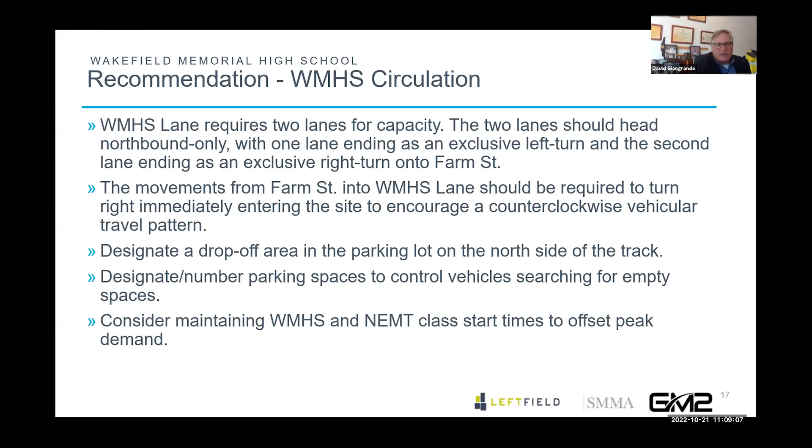If I can jump in, Bill, I hear what you're saying. So how we've proposed the circulation, and we've been working with the district on this, is that you're right that the parking will likely be accessed from the curb cut on Farm Street, but all of the parents and buses dropping off are going to come onto Hemlock and enter the site from that curb cut. I think we can study this further, and ideally we'd have a single lane roundabout. I don't know if there's an opportunity to come back with an actual design of the roundabout to get that approved with this commission. I guess I'm jumping ahead a bit.

No, I think that makes a ton of sense, Aaron. I'm just thinking, if we're doing it for full capacity, because most folks are going to come in the way they come in now, so if you're going to change the distribution of how it gets into the site, you may be able to drop that other lane. That was my only thought.

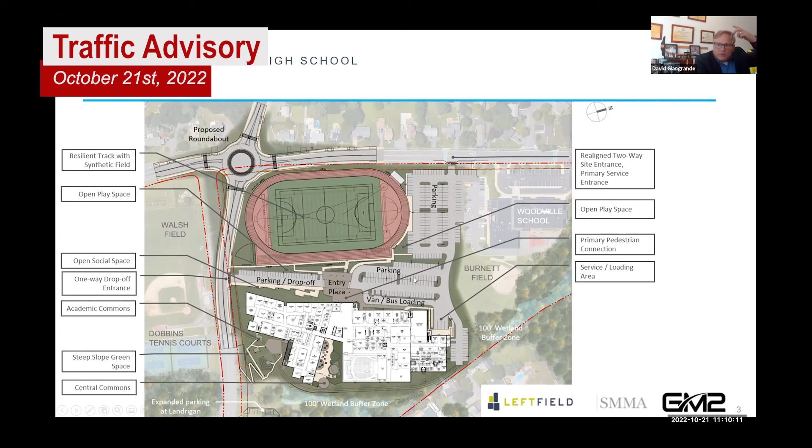Oh, I'm understanding, Bill, what you're saying now. Yeah, I think I misspoke—I said Nahant instead of Farm, so that's probably what it was. So off of Hemlock, it's one way, two lanes all the way in, and that's what I was saying, then two lanes all the way out. If you came in at this location, you'd be forced to take a right turn, circulate this parking lot, and only be able to go in a counterclockwise direction. Everybody up in this area, the buses, the loading would happen here and then go out. So we can tweak that certainly and have some discussions. I'd be more than happy to sit down with you and have that discussion. The thought process is that up in this particular parking area, those would be assigned spaces, because we're concerned about creating too many conflicting movements.

Gotcha. Yeah, so I just think understanding that will make a difference on your roundabout design and how you want folks coming in. That's my only point. I think you did a great job with this. Thanks, folks. Thank you for also listening to our comments. I appreciate that.

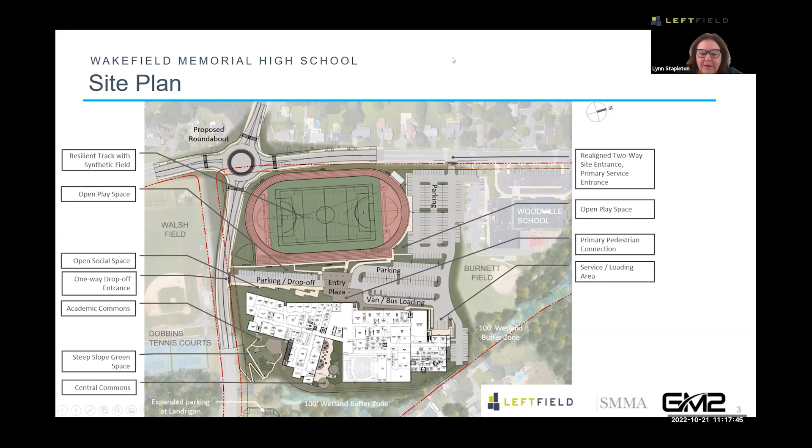No, I'm just concerned with what our next steps are, and when we can get a formal approval of the approach once we get there. Well, we need more information and then we'll get you the approval. So I think we got next steps covered. We'll get you a comment memo, you guys will revise based on the comment memo, and I'd imagine you'll come back to the TAC in November, and as long as everything's addressed, we're good to go. If you need a follow-up meeting with myself or Matt, I'm happy to do that.

Bill, I just have a question on the timing of it. Overall, the project right now is finishing up schematic design, and we're going to have our submission to the state and associated meetings with the school building authority. And then we'll pick up. So the design team will be on hold until the town votes are successful, and our work won't start until maybe March of next year. So do you expect us to close up this issue now, or is this something we can pick up once we start the next phase of design?

I think we're happy to close it up. I don't want to speak on behalf of the TAC, but from all the comments you received, you're not getting a lot of them. We gave you some pointed questions to answer, and I think we can technically box this up by next meeting in November. Yeah, I would hope to. I would agree, I'm not seeing anything major.